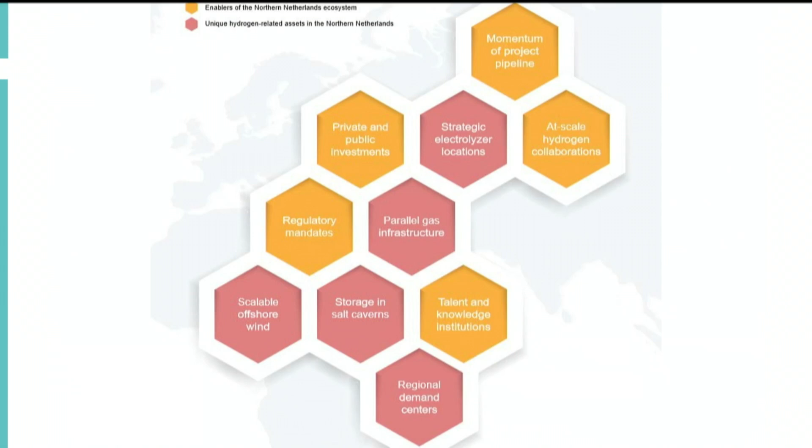Thanks, so let me briefly introduce the presentation. If we look at the northern part of the Netherlands, there are a lot of ingredients already in place to build this hydrogen infrastructure. As you can see on this slide, there are private and public investments that I will talk about later. Also look at talent, knowledge institutes, and the assets already in place, not to forget the port infrastructure that we as Groningen Seaports operate. So on the one hand, energy production; on the other, energy consumption within the chemical cluster, but also the public off-takers in the region, forming all the ingredients that can enable this hydrogen economy in the northern part of the Netherlands.

If you want to move to the next slide, Patrick — here you can see a nice overview of the Netherlands, focusing on the northern part. If we look at the history of the northern Netherlands, I think it's very famous for what's called abroad the Dutch disease, which was inflicted due to the gas reservoir, the biggest on-land European gas reservoir found in the last century in the northern part of the Netherlands, which built the foundation for the current gas infrastructure in the Netherlands, and going abroad towards Germany, the UK, and Belgium.

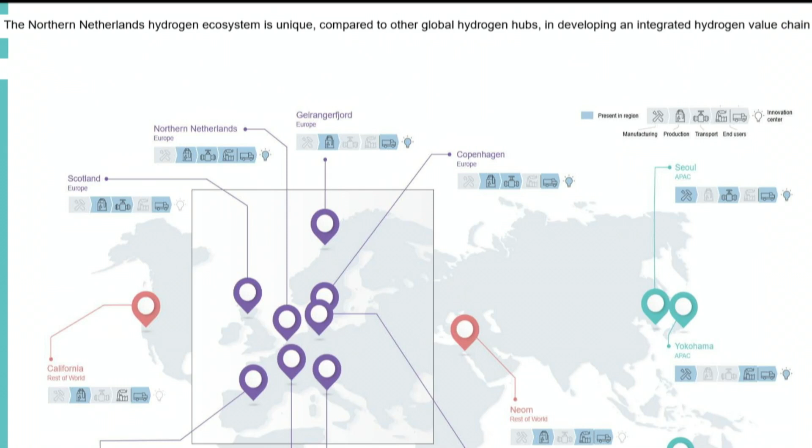I want to emphasize that together with GasUnie, Shell, and Groningen Seaports, we presented this NortH2 project. As was already mentioned, this morning we had wonderful news that RWE, the German energy producer, and Equinor, formerly Norwegian Statoil, also became partners of this NortH2 project, in which we have a very ambitious plan to develop hydrogen infrastructure in the northern part of the Netherlands.

You see here phase 1, mature and scale up, and then expansion towards the rest of northwestern Europe in phase 2. Hydrogen production capacity starts at 5 to 10 petajoules per annum, and we want to expand it to 100 petajoules per annum, with additional green hydrogen production costs having to come down to be competitive.

You see here a nice overview of the ambition, investments needed, and the jobs that will be created. Of course jobs are very important. As a developing organization, Groningen Seaports, it's very important for our shareholder that jobs will be created. That's the main issue during this scale up.

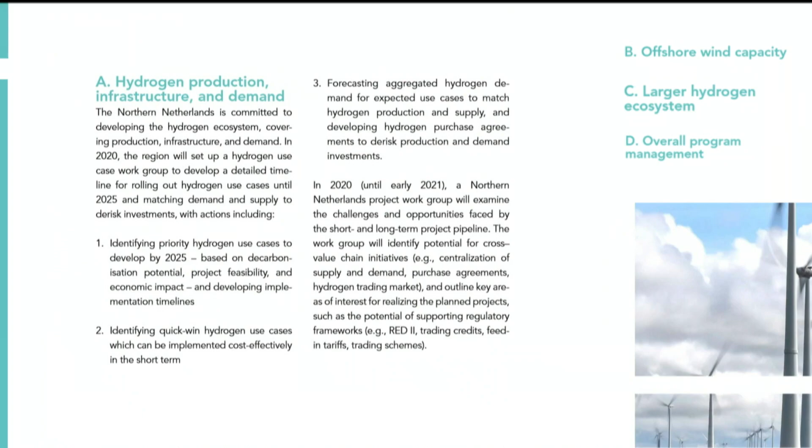It's very important that there is governmental support for expansion of offshore wind capacity. That will bring more renewable electricity to the area, enabling RWE and other hydrogen producers in the area to produce an even larger hydrogen ecosystem and electrolyzers to fill hydrogen demand from industry and other end users. And of course, very important, the overall program management, which is one of the items that Patrick Cnubben with the New Energy Coalition plays an important role in. So it's really a coalition of the willing, so to say.

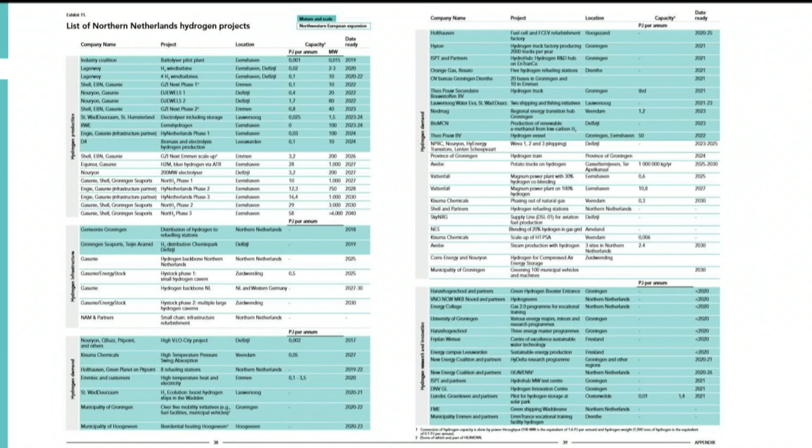On the next slide, I don't think most people can read it, but we can share the report this slide is based on, published a couple of months ago, giving an overview of hydrogen projects within the region. As you can see, it's a very long list, not only on the production side but also transport and utilization of hydrogen. It gives a nice overview of the ambition and willingness of the northern part to shift from natural gas to hydrogen as a renewable form of energy that will also be cost competitive with natural gas.

This list gives a nice overview of all those projects, and combined, this resulted in a grant from the European Commission, a subsidy that will stimulate further development of the hydrogen economy in the northern part of the Netherlands. The Northern Netherlands roadmap, also consisting of phase 1 and phase 2 as previously described, gives an overview of the projects to be realized. For now there's already a list of more than 35 projects in place, combined in this HEAVENN project, granted by a European Commission subsidy, and that will be further expanded - a realistic ambition, I believe.

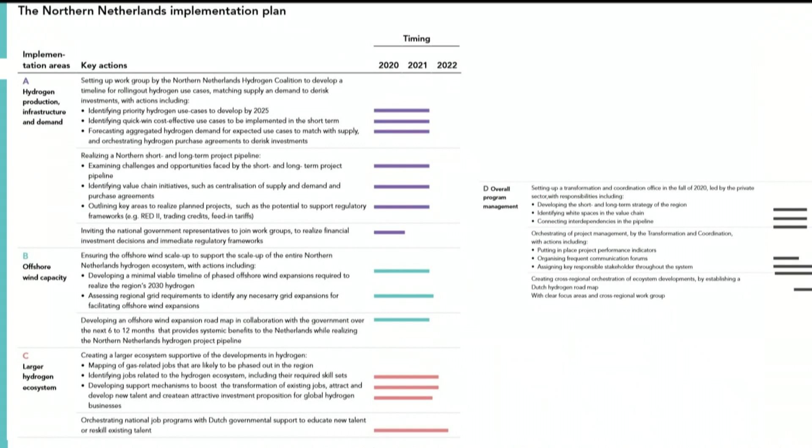Thank you. I had a glitch with my connection, but I'm back again, and I heard the story of Henri, which is tremendous, and it gives a good illustration of what we want to achieve in the Netherlands, especially from our heartland, our Hydrogen Valley region, where the port of Groningen Seaports domain is the centerpiece. We agreed that if there are questions, we can pose them directly, or wait until we finish it all.

I think the best would be to continue to Mr. John Quinn. Let me shortly introduce him. Mr. Quinn is the Senior Manager of Renewable Gas Supply at FortisBC. He's a professional engineer and a chartered engineer with 20 years of experience as an engineer and as a leader in the energy sector. I'm very curious about the presentation of Mr. Quinn. Mr. Quinn, may I give the word to you?

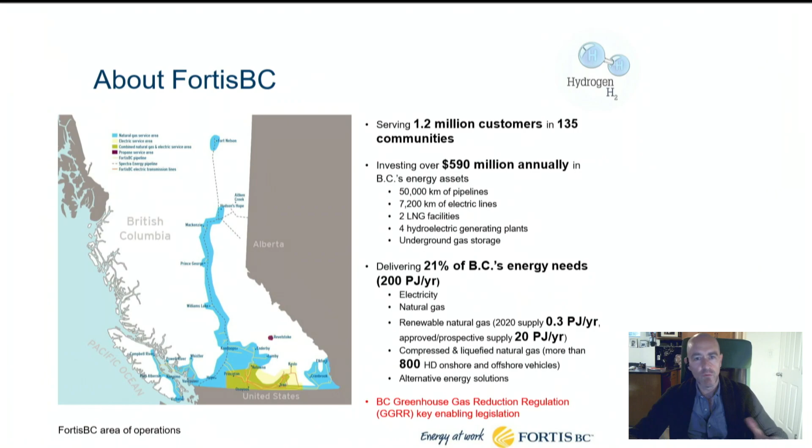In terms of renewable gas, today Fortis delivers renewable gas in the form of RNG, renewable natural gas, or biomethane, pipeline quality product indistinguishable from natural gas. And it represents a small portion of our annual energy delivery, about less than 1%.

I'm going to touch on this in more detail, but over the coming decade we plan to increase our renewable gas supply to about 15% of our total annual energy supply. Out to 2050, much the same as many other jurisdictions around the globe, the sheer volume of renewable product that we will need in our pipelines is quite large. So this is where hydrogen is coming into our horizon, and indeed it's part of our long-term planning right now.

Fortis's clean growth pathway to 2050 is effectively a diversified and, we hope, flexible approach to British Columbia's energy needs. Our 30 by 30 plan represents an interim target, by 2030, to avoid about 4 million tons of CO2. That represents about 30% of our customers' emissions from a 2007 baseline, or by 2030, in energy terms, about 15% of our energy will need to be renewable or low carbon.

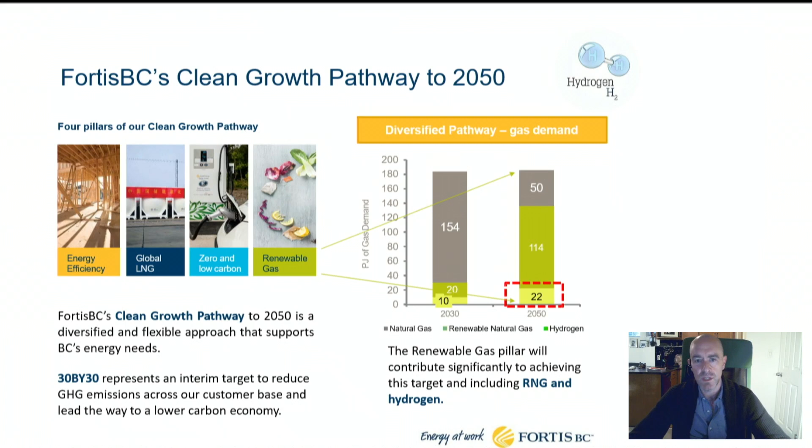On the left-hand side is our current supply, which is primarily all natural gas, just under 200 petajoules. On the right-hand side is our 2050 modeled vision, whereby, because it's not based on net zero, there will still be some fossil methane in our system, but about 75% of the gaseous energy that we'll supply to our customers by that point will be renewable or low carbon. A significant transition, a monumental target to simply put on a deck, but it's the reality. It's the pathway that we must follow.

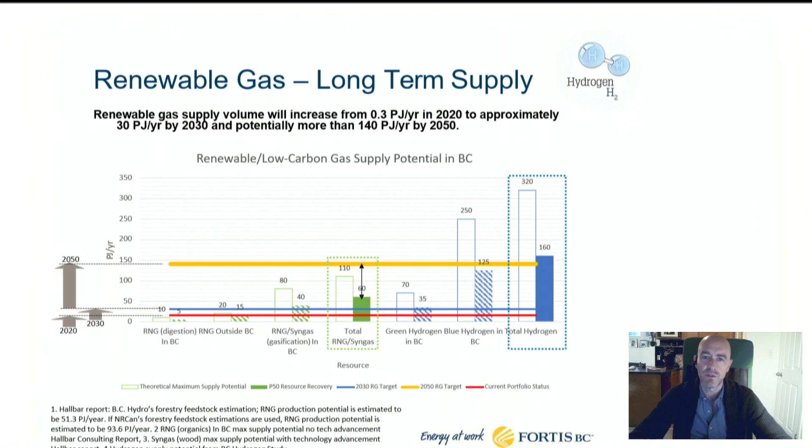The bars along the bottom represent available in-province and some out-of-province renewable natural gas or biomethane, and in-province hydrogen. The solid green bar is the cumulative renewable natural gas from in-province supplies, bolstered by some out-of-province supply, and the solid blue represents the cumulative H2 theoretical production capacity in British Columbia, based on our very green power grid and also our large in-province natural gas supplies to potentially generate blue hydrogen.

It's expected that by 2050, renewable natural gas will provide a significant portion of our targets, but hydrogen will be necessary in the long term in order to meet our long-term targets. We see both renewable gases, renewable natural gas and hydrogen, playing a large part of our low carbon future. So having said that, next slide please.

Transitioning to hydrogen in BC, I missed Sabina's earlier presentation, but I'm sure she touched on this. The graphic in the top left-hand corner has quite a bit of concentrated detail. This is taken from the BC hydrogen study, which is quite recent. It was released in December 2019 and is publicly available if anyone on this forum would like to check it out.

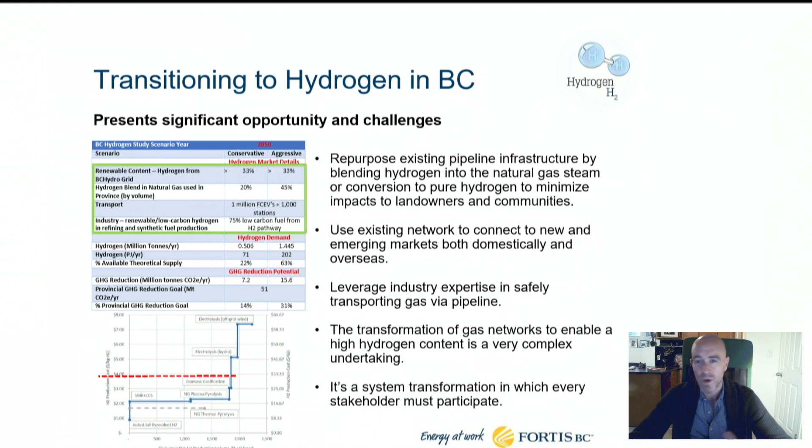This table summarizes both a conservative and aggressive scenario by 2050. I can't see this slide because it's so small, but I think I remember it. Effectively, it looks at about 1,000 fuel cell electric vehicle refueling stations, about 1 million FCEVs on the road, about 45% by volume of the gas in our provincial gas supply system being hydrogen, and this would require about 1.5 million tons of hydrogen produced per annum.

While this is quite a grand vision, there's a few that present significant opportunity and challenges. There's a few key levers that we have in British Columbia to enable hydrogen at scale: our provincial gas supply chain and existing infrastructure, obviously the same as many other jurisdictions around the world. As we heard this morning from Henri, leveraging our existing gas infrastructure right along the value chain, from storage, high pressure, right down to burner tip, is going to be key in affecting this transition.

Here at Fortis, we're really at the start of this transition. So in addition to looking at what we will need to do to affect this transition, we're also thinking about how we future-proof the infrastructure that we're currently building and planning to build for this new future.

It goes without saying, but I always need to say this to ground the conversation around hydrogen: the transformation of the gas networks to enable a high hydrogen content, which is really what we're talking about here, is quite a complex undertaking, no doubt about it. This is another reason for industrial collaboration. We need to make sure we do not repeat each other's work, that our investments are effectively streamlined to the extent possible to maximize value and effectively transition our energy supply regime.

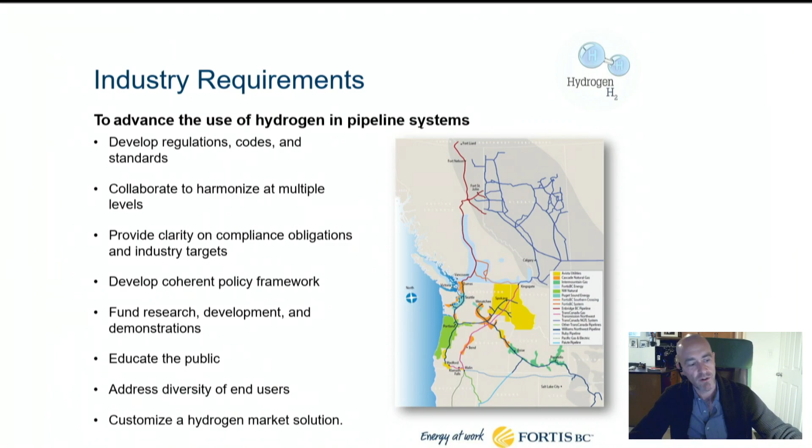Finally, I mentioned we have 1.2 million customers here in British Columbia. There are millions of customers connected at the grid edge in our region, as you can see on the screen right now. So we have a diversity of end users with varying tolerances for hydrogen that we'll need to be aware of.

Development progress: Fortis has been planning around the development of hydrogen since about 2017, with a couple of key points recently developed in 2020. Fortis, including our partner local distribution companies and midstream operators here in British Columbia, is planning a province-wide hydrogen feasibility study.

This study will investigate the extent to which hydrogen produced from renewable and low-carbon resources could be blended with natural gas to reduce the carbon intensity of energy delivered in British Columbia. This initiative is at the pre-FEED conceptualization stage, but it's going to be one of the key activities over the coming years to really answer our questions, our need-to-knows around hydrogen in British Columbia.

In doing so, we intend to coordinate and assess the feasibility of recertifying the utility's natural gas supply chain to deliver a hydrogen natural gas fuel blend. Next, I'll touch on some of the core aspects of this feasibility study, which is quite broad-ranging and multifaceted. We want to identify and address the challenges of widespread supply of hydrogen, so mass market adoption of hydrogen, which again is one of the things we're talking about here to be successful with hydrogen at scale.

The potential proponents of this provincial hydrogen study want to build a knowledge base to inform unknowns or knowledge gaps around safety, technical, economic, regulatory, innovation, research and development, capital investment—the full gambit of requirements needed to introduce and increase hydrogen blend concentration levels over time. This will also include looking at infrastructure where we can repurpose it to 100% hydrogen.

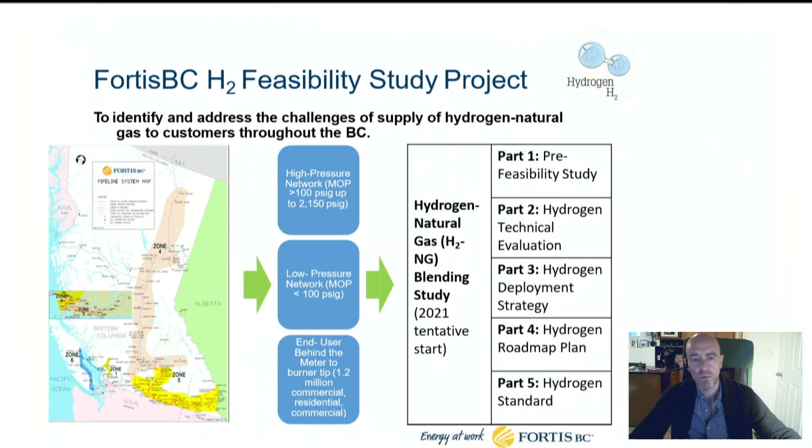We want to address these unknowns to support key internal and external stakeholder decision making, and we want to identify for ourselves the requirements and the work that will need to be completed in the near term and the longer term to ensure us, the utilities, our energy delivery networks and customers behind-the-meter end-use equipment continue to operate safely and reliably. So finally, my last slide.

Thank you, Patrick. So the objectives and goals—I mentioned hydrogen feasibility study because it's broad ranging, high level. It covers our province, all our infrastructure, just like we've heard mentioned this morning and like we see appearing in every other jurisdiction around the world.

We will need to develop key demonstration or pilot projects around hydrogen. All the words on all the pages ever written will not prove hydrogen until we actually start deploying it in our infrastructure, supplying it to our customers, ensuring it is safe and economical to do so. So we're planning.

Thank you. I had a glitch in my connection. Thank you very much. I heard a lot of very interesting things from Mr. Quinn, especially very interesting are the harmonizations and regulatory codes and standards issues. I think one of the things we need to do in our region.

But now we have to go to Professor Brouwer, Jack Brouwer. He's a professor in mechanical engineering and aerospace engineering and the director of the Advanced Power and Energy Program at the University of California in Irvine. And I think we had the pleasure to meet each other, Jack, I think 1.5 years ago with our regional minister—made a lot of impression. And may I give the word to you now, Jack? Thank you very much.

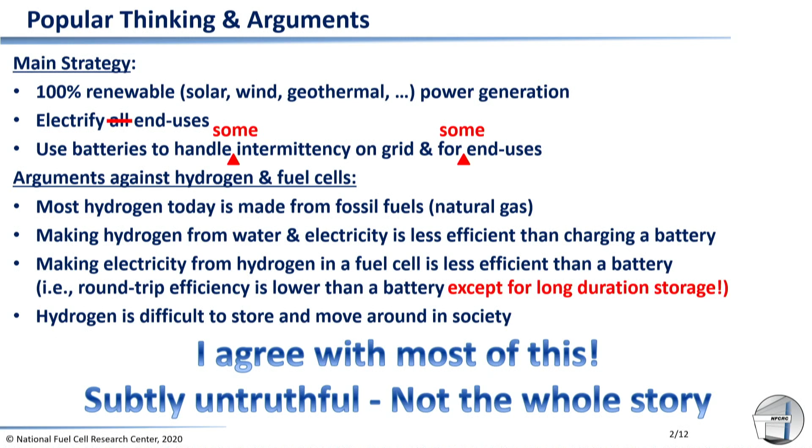Interestingly—keep going pretty quickly here—I agree with most of these comments. They are just subtly untrue, and they don't tell the whole story. We can't electrify all end uses. We can only use batteries for some of the intermittency and some of the end uses. And long duration hydrogen energy storage is actually more efficient than battery energy storage. And finally...

We have done studies of our electric and gas systems. In an annual simulation, we can make it through the year with wind and solar energy, but we don't have enough storage in either our pumped hydro system, or if we made even all of our vehicles battery electric vehicles and only used them for grid storage. The only resource that is reasonably sized to enable a zero emissions electric grid is our gas grid.

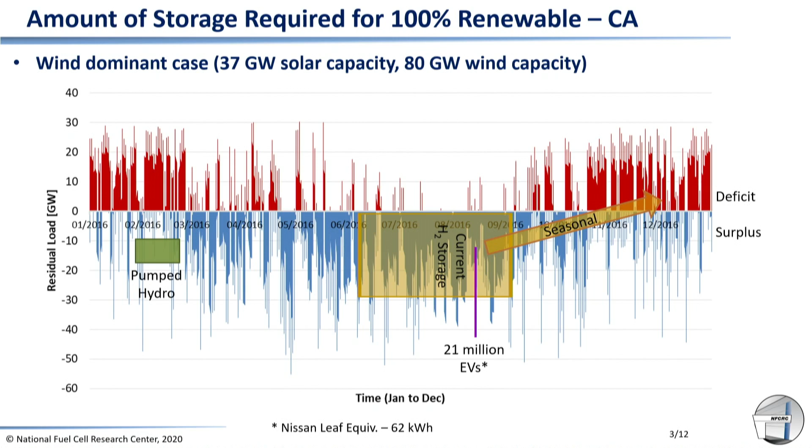And this is how big it is from a storage of hydrogen perspective. It's the only resource that can enable a 100% renewable electric grid. It's also the only one capable of doing seasonal storage, taking all of this renewable electricity in the middle of the year and converting it to the fall and winter. And it can do so more efficiently than batteries. Batteries will never be big enough to accomplish 100% renewable in our electric grid.

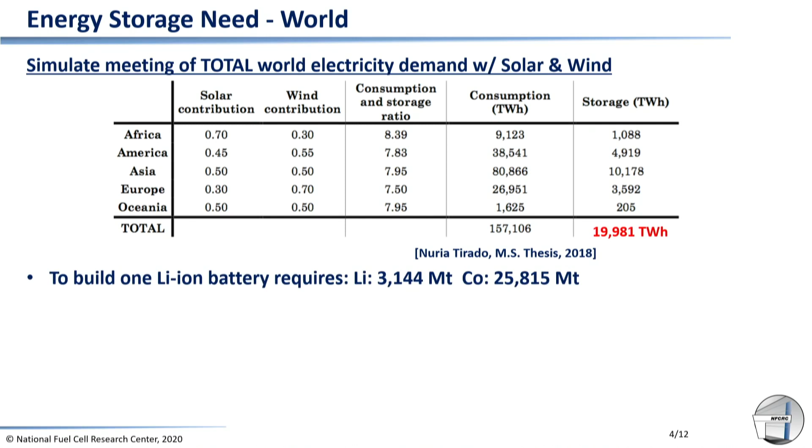We did the same analysis for the world, and we determined that it takes 20,000 terawatt hours of energy storage for us to make it through the entire year with renewables only. We need 3,144 megatons of lithium and over 25,000 megatons of cobalt to make just the first battery to store all of that electricity. It's not even possible with all of the resources we have in the world. We have orders of magnitude too low resources to use the best batteries in the world for that.

We should use batteries for cars. We should use them for power electronics like our cell phones and the like. We can't make batteries this big. We don't have enough resources on Earth.

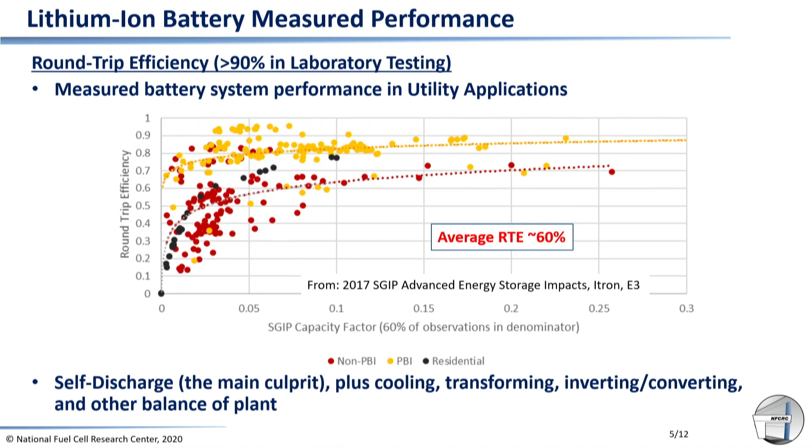It's mainly because they suffer from self-discharge. If you charge a battery and leave it stored for a while, you cannot get that energy back. You know this from your own automobiles. If you don't drive your car for a couple of months, the battery's dead. Not because it's a bad battery, it's because all batteries suffer from self-discharge and are not good for long duration storage like hydrogen is.

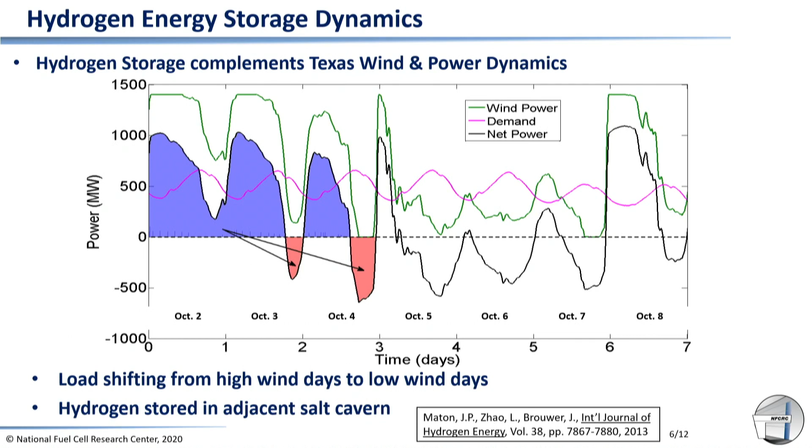The dynamics of meeting all of our energy needs with solar and wind inputs alone can definitely be followed by the electrolyzers and fuel cells, as we've shown in these simulations of wind power meeting the dynamics of an adjacent community. We've also shown that you can store the hydrogen in things like salt caverns and have the temperature and pressure dynamics of the hour by hour, week by week, even seasonal storage of renewable electricity accomplished by renewable hydrogen.

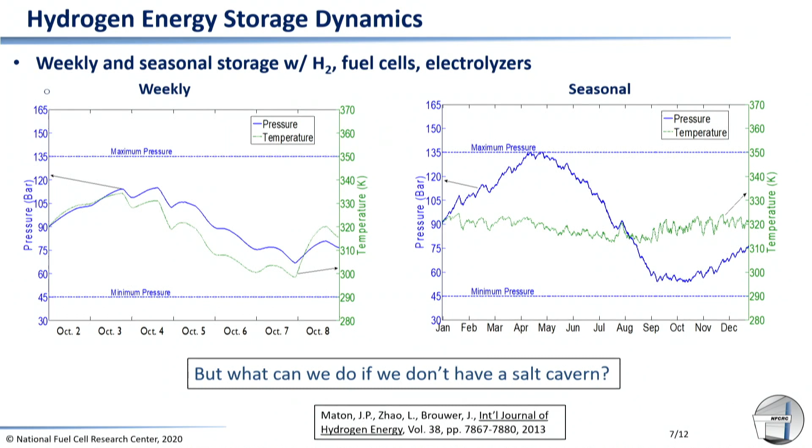But if you don't have a salt cavern, what do you have for moving the energy around in society and for storing it? We have natural gas infrastructure. That's what we must transform in order to enable this zero emissions future. We've also looked at ports, and we had this thought experiment that we have analyzed in detail: can we actually make whole ports zero emissions using the hydrogen vector?

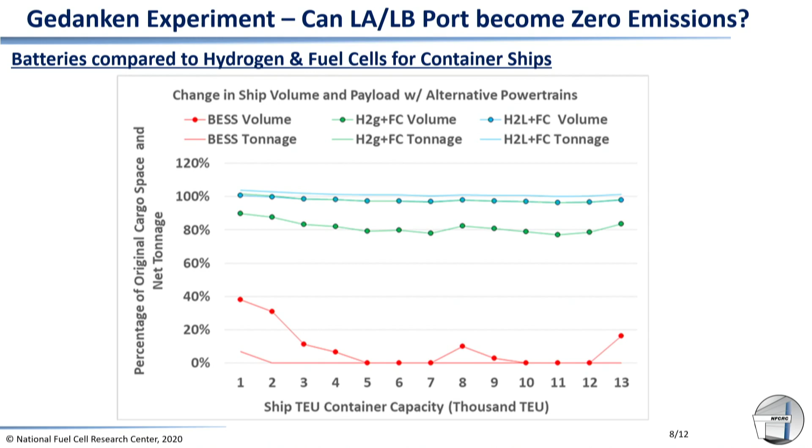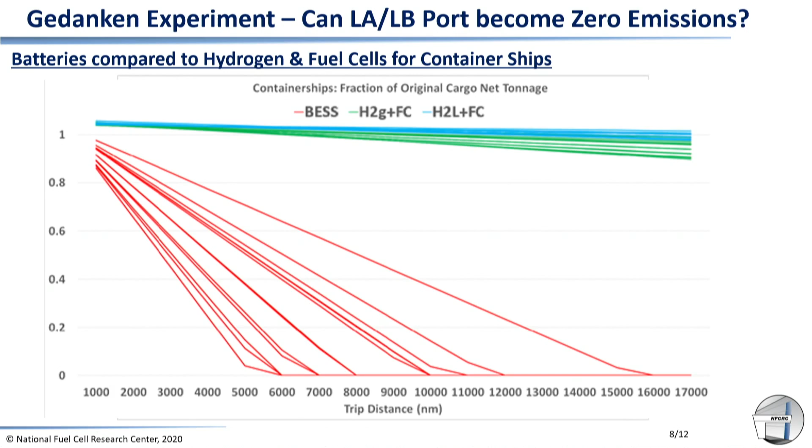It's quite abundantly clear that these kinds of port operations cannot be made zero emissions with electricity and batteries alone. Now, there are some battery applications, but the ships definitely can't do it that way. The ships can't be long haul and heavy payload unless they have something that's lightweight and energy dense, like hydrogen, or hydrogen vectors like ammonia or methanol that's made from the renewable hydrogen that we know we can produce.

And how much hydrogen do we need? For the entire port of LA Long Beach, we need 8.9 million metric tons of hydrogen per year. And people think, whoa, can we make that amount? We just looked at offshore wind. Offshore wind and just 3 farms off the coast of California could completely decarbonize all of the ships, all of the trucks, everything going in and out of the Port of Long Beach. We have enough renewable resource and we can make renewable hydrogen from those resources. And when we make it at that scale, it's going to be cost effective.

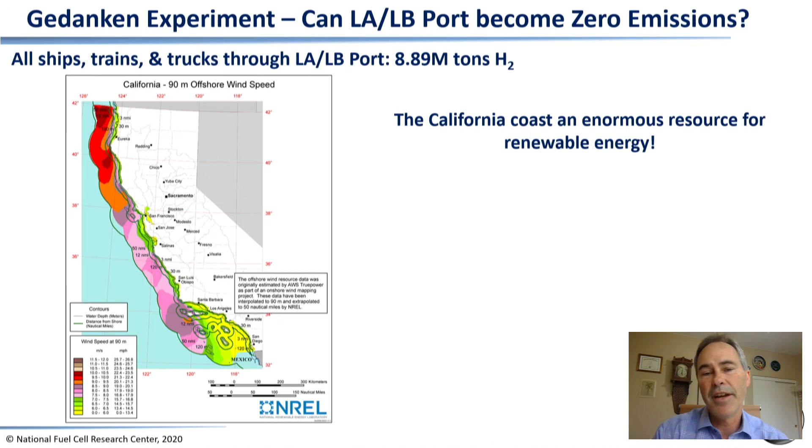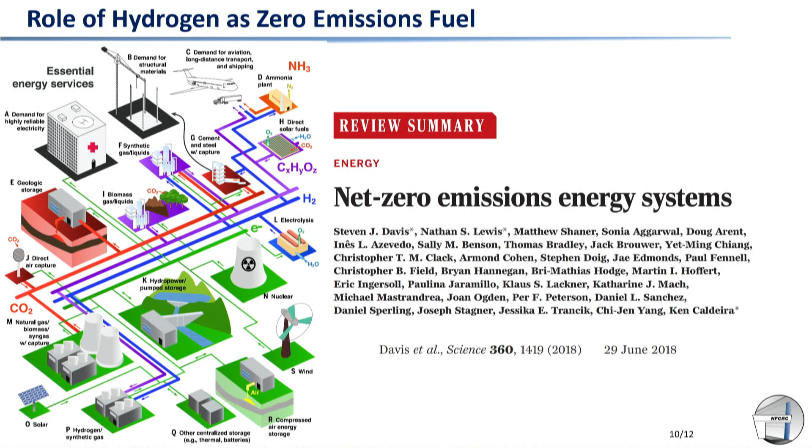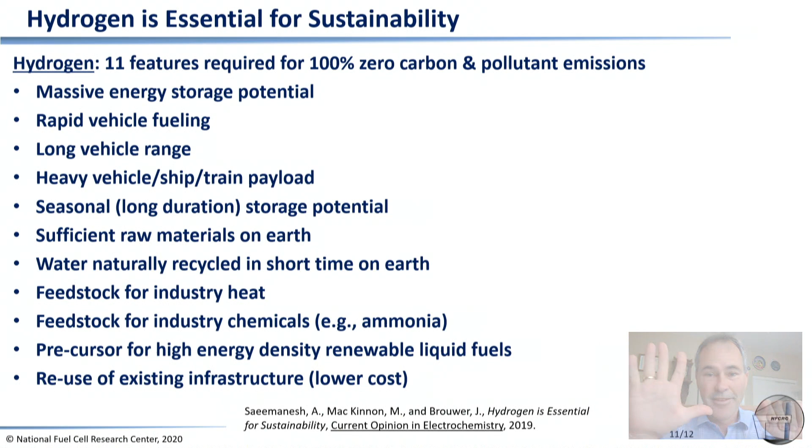I can't cover all of the features of hydrogen that make it essential for zero emissions, but we wrote a paper, and there's at least 11 reasons we must adopt hydrogen and renewable hydrogen to achieve zero emissions. So do we really need hydrogen? Hydrogen is essential for zero emissions.

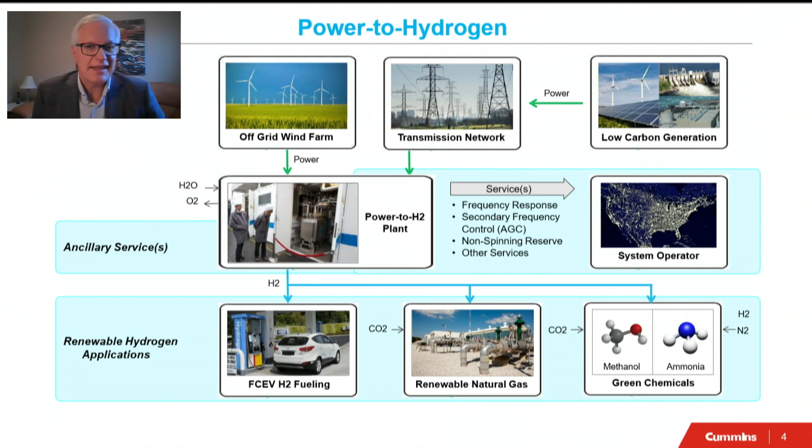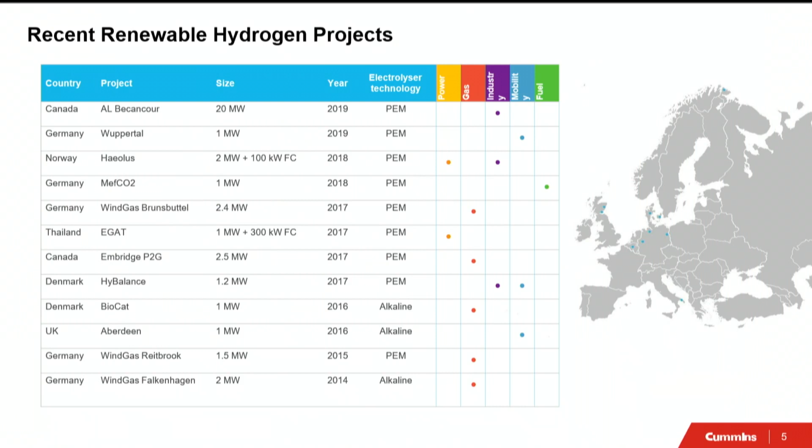We've done over a dozen projects. Most of the projects have been in Europe. The largest one in North America is the joint venture that we've done with Enbridge. But 5 of the projects, when I looked at this, are related to power to gas, the original concept of using hydrogen to decarbonize the natural gas stream.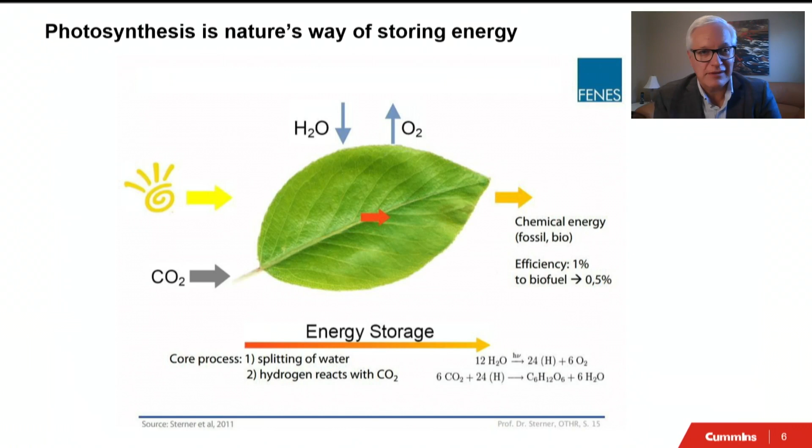Moving to the next slide, that's really the model for power to gas. The original concept was to use electrolysis to produce hydrogen from renewable sources, methanize that with a carbon capture stream to produce renewable natural gas, and have a whole integrated cycle of capturing energy, using carbon as an energy carrier, then releasing that carbon and capturing it again. So the original concept was a technical copy of photosynthesis.

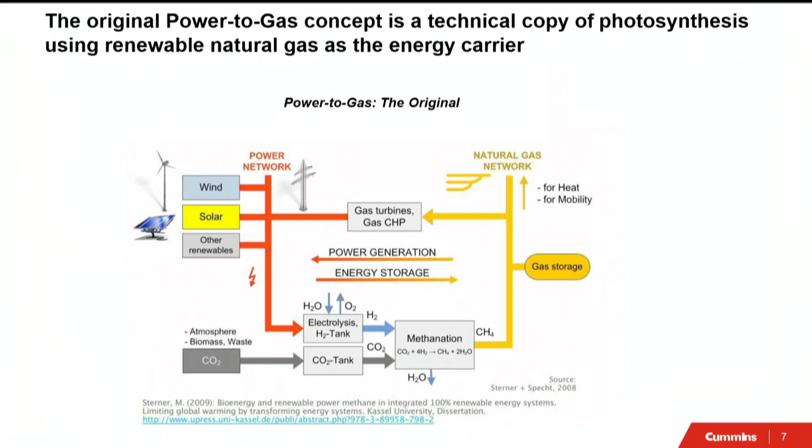In the projects we're working with, the companies are looking at the full gambit. On the power to gas side, they're looking at both producing renewable hydrogen as hydrogen and as a way of decarbonizing natural gas. Next slide.

I'm just going to run through a couple of projects I've been involved in. The Wind Gas project in Falkenhagen, a Uniper project in 2013, was the very first power to gas plant in the world. We supplied 2 megawatts of electrolysis equipment for this project. It was developed in Falkenhagen in an area predominantly with wind resources, so it's 100% renewable energy, and was blending to a maximum percentage of 2%.

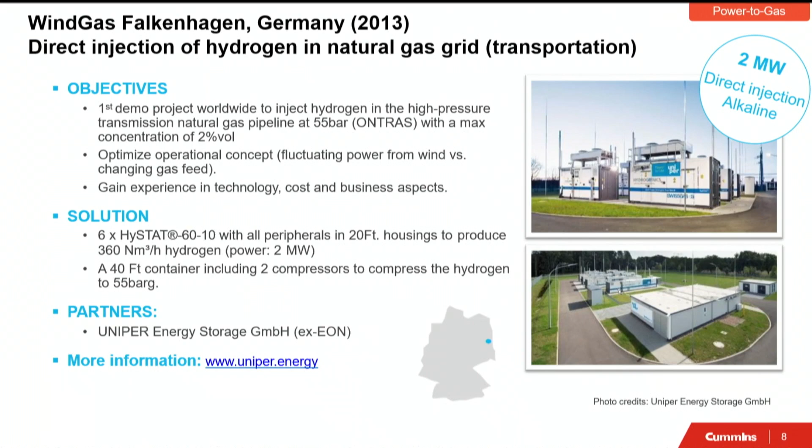This project had a partner, Swiss Gas, which took a portion of the output, and they are selling this renewable natural gas with a hydrogen blend as Wind Gas, a residential option as a premium product. Subsequently, this project has also been developed for a catalytic methanation project in a subsequent stage.

Next slide, please. Another project we partnered with was Electrochaea in Denmark for the Biocat project. This is one of the first biological methanation projects in the world, capturing biogas waste from a wastewater stream and upgrading the biogas to convert the CO2 in the biogas stream to renewable natural gas.

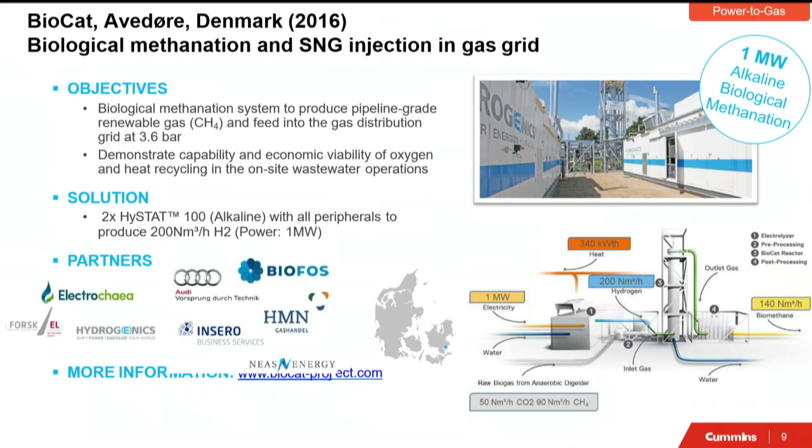Next slide. And the key ingredient here, besides renewable hydrogen, is microbes that basically consume that combination of CO2 and hydrogen in the process of heat and produce synthetic natural gas.

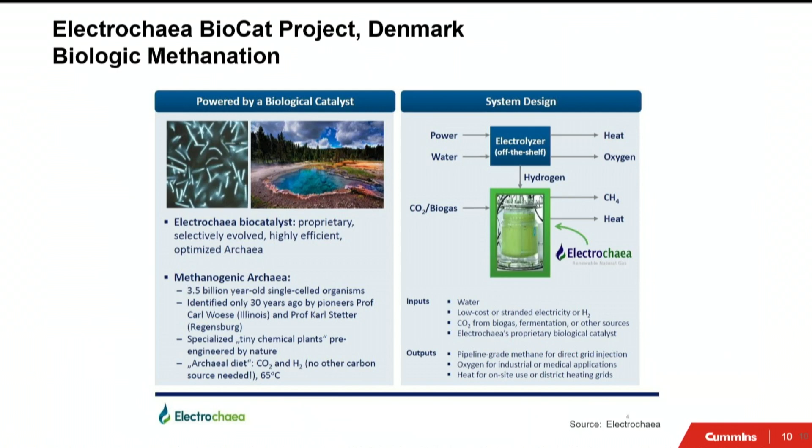In this demonstration project, one of the interesting things is that the archaea, or those microbes, can turn on and off. So if you're tied to a renewable energy source that isn't producing all the time... I've not seen the plant myself, but I've seen enough pictures and demonstrations to know that bright green is their color when those microbes are active. So they ramp up and down with the renewable energy stream that is powering them.

Next slide. This is a project we weren't involved with, but I think it's fascinating, because those microbes that you could put in a plant also exist in underground reservoirs. RAG, Austria's natural gas utility, has demonstrated producing renewable natural gas underground in existing sandstone reservoirs with the injection of CO2 and hydrogen to produce renewable natural gas.

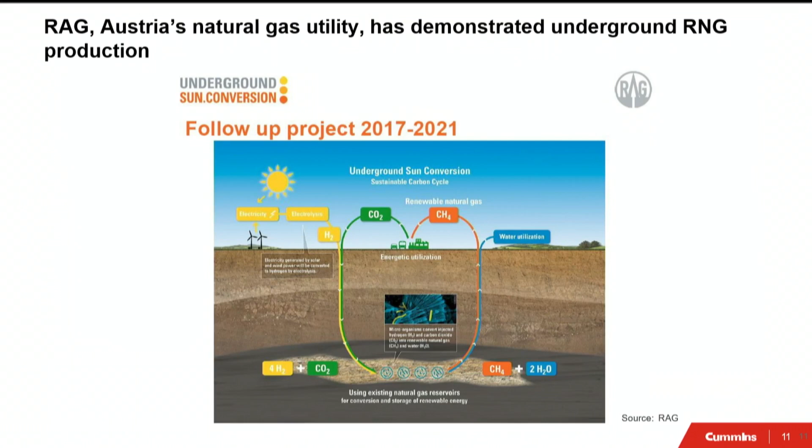Now I'll talk about a project that's closer to home for me in Toronto. Next slide, please. This is the Markham Energy Storage Facility in Ontario. It's the first multi-megawatt renewable hydrogen project in North America, and it's been operating since May 2018.

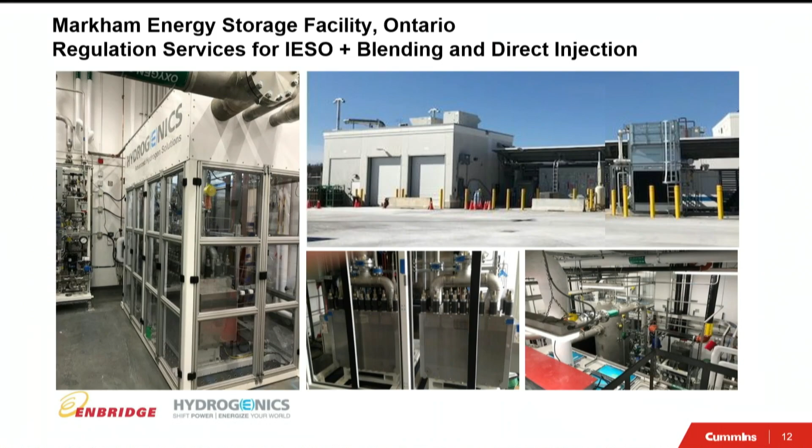It's a joint venture between Hydrogenics and Enbridge, and the initial application was providing regulation services for the IESO under contract, the grid operator in Ontario, and it's actually dispatched by the IESO. The second phase, which is well underway, is direct injection of that renewable hydrogen into the natural gas grid, and Enbridge has taken the lead on this.

Even though it's a demonstration project, it was required to do a Leave to Construct application with the Ontario Energy Board. This is a rigorous public hearing process that took 11 months, with multiple interveners asking questions, environmental reviews, First Nations reviews, but on October 29th, received a favorable ruling to go ahead with the project.

That's important not just for the demonstration, because it sets the stage for larger scale commercial projects for blending, which are of interest to companies like Enbridge, Fortis BC, and really, looking at the whole of North America, this will be a benchmark demonstration project for gas utilities across the continent.

Some of the restrictions are the 2% blending initially, similar to what we've seen in Germany and other jurisdictions. There were also special considerations because Enbridge's demonstration is blending into distribution gas lines, which is more challenging than a transmission line due to gas flows. But it actually broadens the application of direct injection of renewable hydrogen into the gas grid, because it can be done in many more places. Next slide.

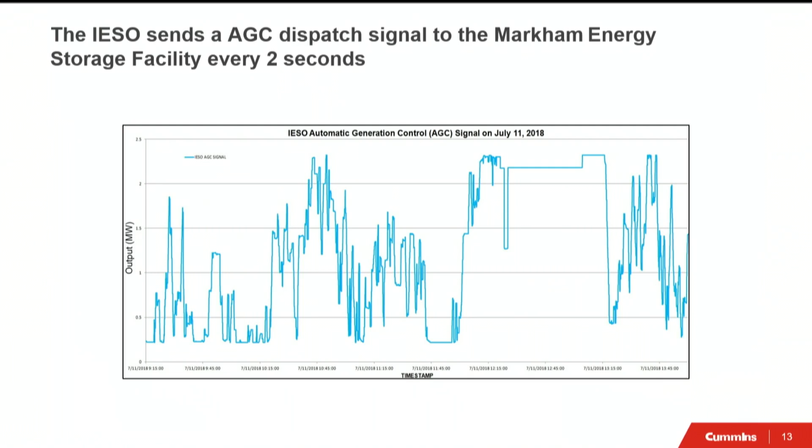I'm going to briefly talk about frequency regulation. This is the dispatch of the plant. The capacity of the plant is 2.5 megawatts, and the dispatch is on 2.1 megawatts. This is the signal we get from the IESO. An AGC signal is sent every 2 seconds, and on the next slide, it shows the overlay of the set point in green with the response.

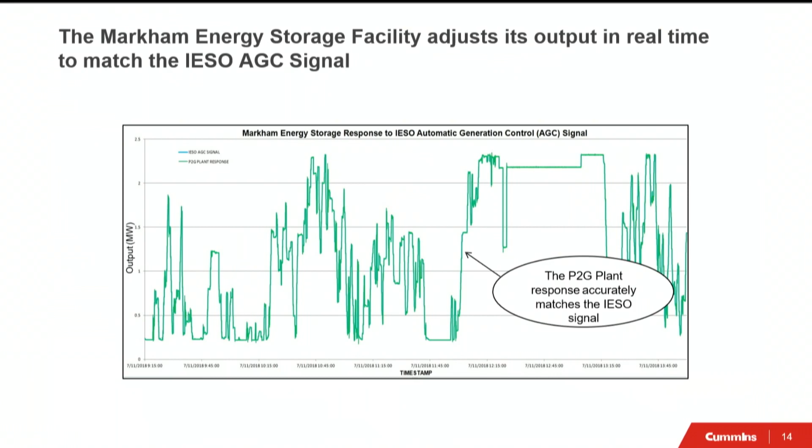The reason this is interesting is that, as I mentioned, as an additional revenue stream, the dynamic response of an electrolyzer is extremely fast. So you could use this for a portion of the capacity of a plant and augment revenues while producing renewable hydrogen for power to gas.

Next slide. Just very briefly, the development of the PEM electrolysis, which is our product platform for large-scale electrolysis, covers 20 years. The Markham facility was our first indoor facility, and that informed the development of our 5 megawatt HyLYZER-1000 platform, 1,000 normal meters cubed per hour, or 2,000 kilograms per day nominal output.

That plant development led to our first commercial deployment, a 20 megawatt plant with Air Liquide in Quebec that's being commissioned today.

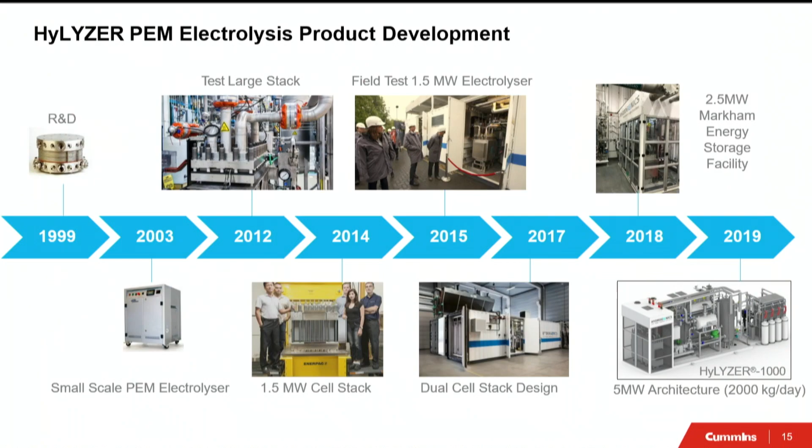Next slide. I think that's it for me, but that gives you a highlight of some of the projects with power to gas. We see with the utilities that we've worked with tremendous interest in renewable hydrogen for decarbonizing gas grids, and this project with Enbridge is really going to be a pathfinder sort of project in North America to help open this up for Enbridge and many other utilities as well. Thank you.

Apologies, I was still muted. Not mute, but muted.

Thank you, Mr. Harvey, for this elucidation. Also, thank you to the other speakers. We have received some questions, and we could address them. But my first response is that there are so many similarities between our side of the ocean and your side of the ocean, that it would make sense to intensify collaborations.

That's what I think, because if you look at our region, as Henri touched upon, we are located at this very big energy park called the North Sea. And looking at California and British Columbia, your energy park is the Pacific and adjacent region. So it makes a lot of sense, and probably also in the southern parts of the United States due to the high solar intensities.